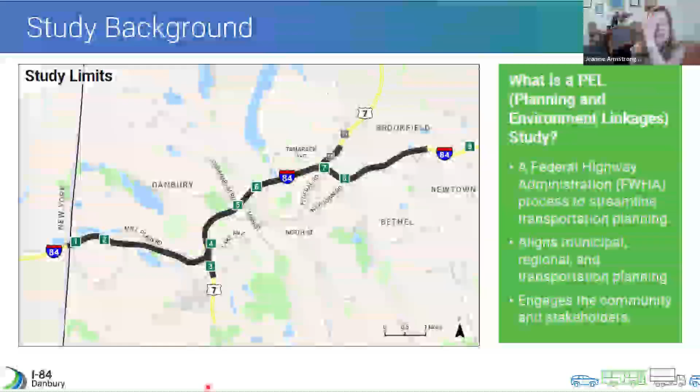So Janine will start taking us through the study background. Awesome, thanks Kevin. So hi everyone, I'm Janine, as Kevin said. I'll start us off today, and we've got lots of really good information to share with you.

As Marcy indicated, PEL stands for Planning and Environment Linkages, and it's a process under the Federal Highway Administration that streamlines transportation planning. The PEL really aims to align municipal, regional, and statewide transportation planning efforts such that they are congruent and complementary. It considers things like the environment, community, and economic goals, and tries to do that early in the transportation planning process.

A key element of PEL is the interaction with community members and stakeholders, such as yourself. Some of you have been in meetings previously, I recognize some of your names. Through this process, we've held several community information meetings, engaged with a project advisory committee, or PAC, which includes local government representatives, businesses, stakeholders, organizations, neighborhood groups, and the like. We've also held a number of pop-up meetings at various venues throughout Danbury and the surrounding area to really understand the concerns and ideas that folks in the community have.

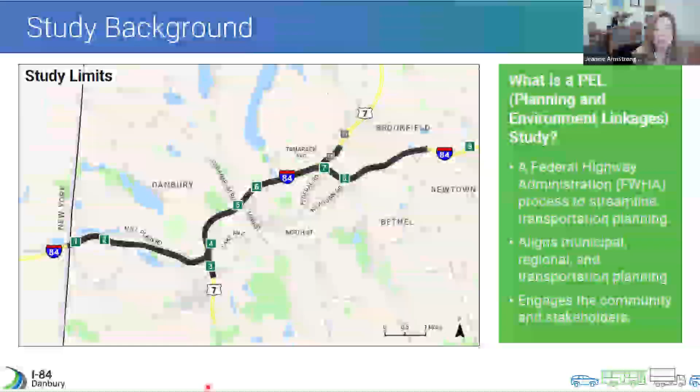So as you can see in this graphic, this is our PEL study area. It's about a 10-mile portion of the I-84 corridor. It extends slightly beyond the New York State border to the west and slightly beyond Interchange 8 to the east, going towards Newtown.

Next slide, thanks. So the PEL study is really the initial element in a progression of actions towards developing one or more viable projects. Through the PEL study, which we'll spend the majority of our meeting today talking on, we've identified and evaluated a number of potential projects and analyzed their feasibility, which we'll present in greater detail today. But there are a number of other processes that come along as well.

Once the PEL study is concluded, and we're right at the precipice of concluding that, the next phase will consist of the environmental study and analysis through two different federal and state acts: the National Environmental Policy Act, or NEPA, and the Connecticut Environmental Policy Act, which is CEPA.

So through these processes, the alternatives we'll talk about today are thoroughly vetted for potential human and environmental impacts. The next key element after NEPA and CEPA review involves regulatory permitting and design from the engineering perspective. Finally, we go to construction, possibly in phases, depending on the size and extent of the improvements and the number of projects. That's a very high level overview of the process.

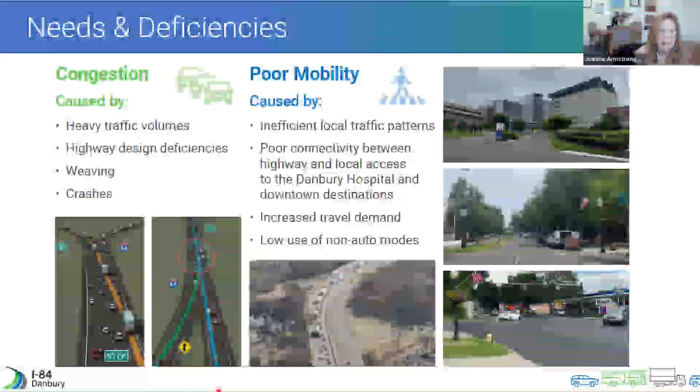So that's congestion. On the other side of the equation is poor mobility, which is the inefficiency of moving people and goods to and through the greater Danbury area. It's also attributed to a number of things, including the grid through Danbury that doesn't provide very good east-west alternatives, poor connectivity between the highway and key local destinations like downtown and the hospital, increased travel demand, which also exacerbates poor mobility, and the lack of alternative travel modes - things like robust bus, rail, bicycle, and pedestrian lanes. So all of these are things that we've seen on the highway.

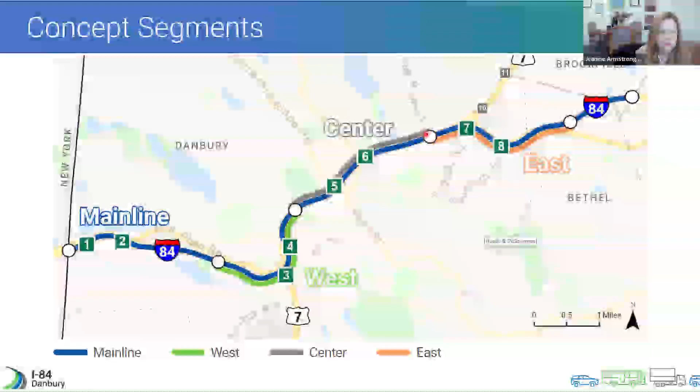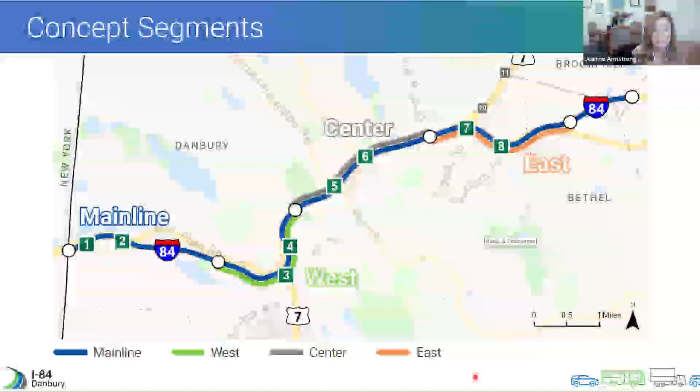In order to better analyze the different issues along I84 and the adjacent corridor, we broke the study area up into 4 distinct segments as shown on this graphic. The main line, which runs along the full study area from left to right, is shown in blue - Sharat's showing it in red. The west segment is shown in green, the center segment is shown in gray, and the eastern segment is shown in orange. We broke the highway up this way to enable us to assess how individual concepts can address the unique needs in a distinct area within the 10-mile corridor. We're going to spend a good amount of time getting into the details of what those concepts and issues were.

So the PEL analysis began with 26 separate concepts or improvements. Each of these was aimed at addressing the 2 main areas of deficiency, which is congestion and mobility issues. We had 7 concepts on the main line, 3 in the west segment, 9 in the center, and 7 in the east segment.

Concepts included things like interchange and ramp improvements, some highway modifications to create continuous or express lanes. We looked at interchange improvements, transit options, a wide variety of strategies that focused on operational improvements, travel management solutions, and then a number of alternatives that included something called a collector distributor road, which is just a roadway that collects traffic from the exit ramp and distributes it to a local roadway. Typically, it's in parallel to the highway.

So we want to back up a half a second. How did we come up with these concepts? Well, we had lots of meetings. We had workshops with the city, with the public, with the PAC, state and federal stakeholders, with DOT, with FHWA, the consulting team, and a whole bunch of others.

And each of these concepts or potential improvements was analyzed through a 3-tier process. The first is a fatal flaw analysis, which looks to determine if the concept was consistent with either reducing congestion and/or improving mobility, if it was feasible from a construction or cost perspective, and if it had the potential for excessive or disproportional environmental or community impacts.

When we look at the next part of the interchange pairs on 5 and 6, this is mostly just working through the lane continuity with those breaks, so there's not much else going on in this area.

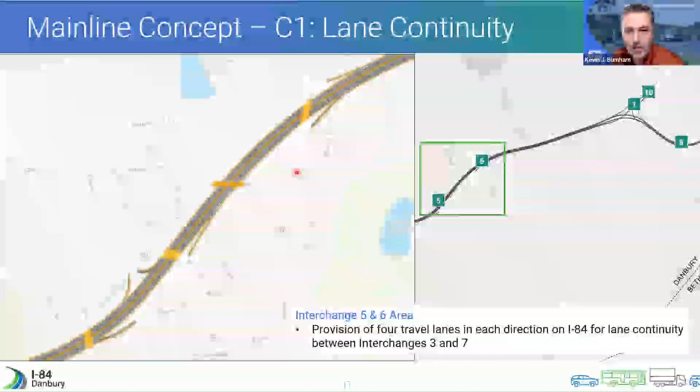In the interchange 7 area, similarly, we do correct some of that lane continuity, but again, like interchanges 3 and 4, we deal with a left-hand exit brought back to the right-hand exit. Also, that is these two here that are shown in red and blue.

Next is also dealing with some of the traffic that is coming from Route 7 southbound and merging with 84, and that's making a provision for that to be two lanes of traffic there to help ease some of the backups.

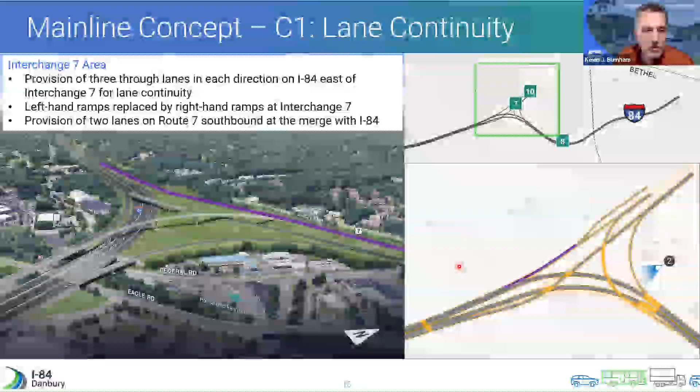Go to the west concept. We in this one, we were dealing... no, oh here. Don't seem to have the west. So we'll talk about, we're somehow missing the thing. So we'll try to get back to that. But these are actually the different concepts of the center section.

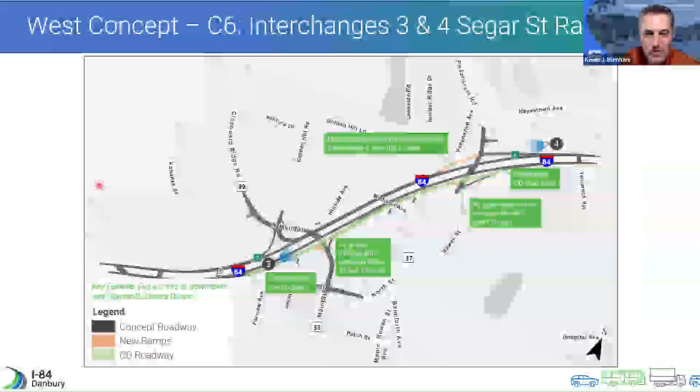So those dealt mostly with different access problems. So go back to the other one that seems to be mislabeled, Sharat, but if we back up one slide, this one is a scenario, a concept that looks to better connect the two. Oh, he's jumping to that. Well, I'll wait till you get to that if you're going to get to that right slide. Are we sticking with this one, or are we going to go to? Stick with six. Stick with.

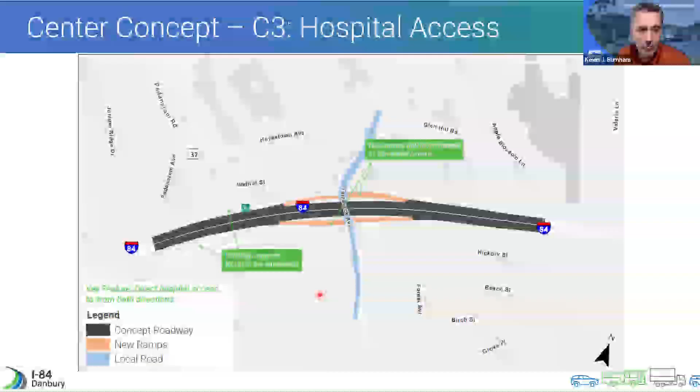Okay, so in this case, there were three in the center section. There were a lot of access problems in that middle area, and we had three ways to look at them. The first one, the one that you see here, provides full access interchange at Tamarack Avenue. This would provide ramps from both directions that would give better direct hospital access in both directions.

The other possibility is to use a partial interchange at the Great Plain Road interchange. Let me jump here if you're having a problem there. Yeah, it's kind of lagging a bit. So yeah, I'm going to jump here for a second.

Present my one so that we... give me just a second for it to come up. Does everybody see that screen now? Not yet. It's sharing your Windows, a blue Windows screen right now, oh Kevin. Sorry about that, it might be on the wrong window.

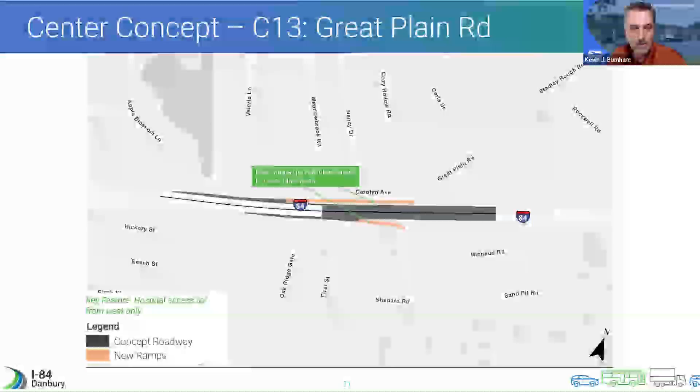Yep, and it's not getting over to the right. There you go. Well, now it's showing center concept C13, Great Plain. Okay, so that's back with Sharat, right? That's you, Sharat? Yeah, okay, so this center concept

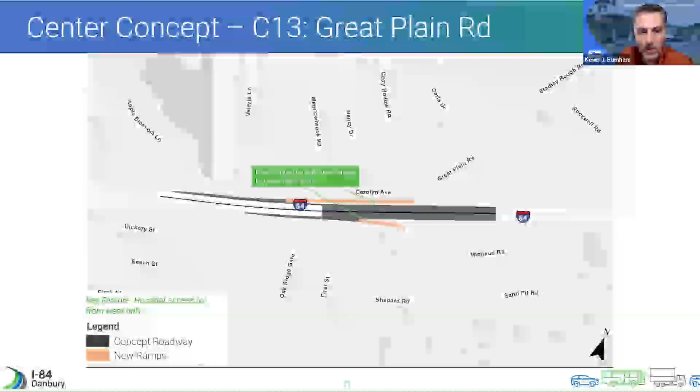is showing access to the highway to Great Plain Road, which does provide some better hospital access, but the disadvantage of this compared to Tamarack is that it only provides these partial ramps, so the access to and from the west is good, but the east does not get that same benefit.

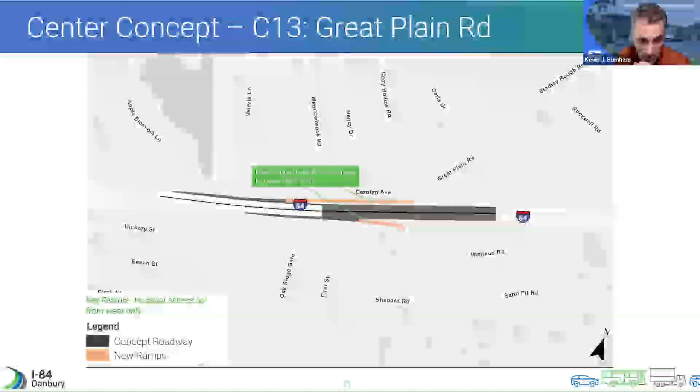If you can try to get back to that, here we are on this third center concept, which looks to better connect some of the business areas, the downtown access to the downtown business areas, by creating a collector distributor road between exits 3 and 4 and adding some new ramps to complete the interchange at North Street.

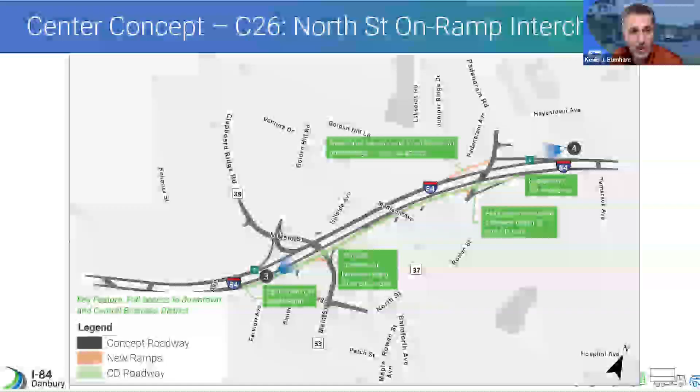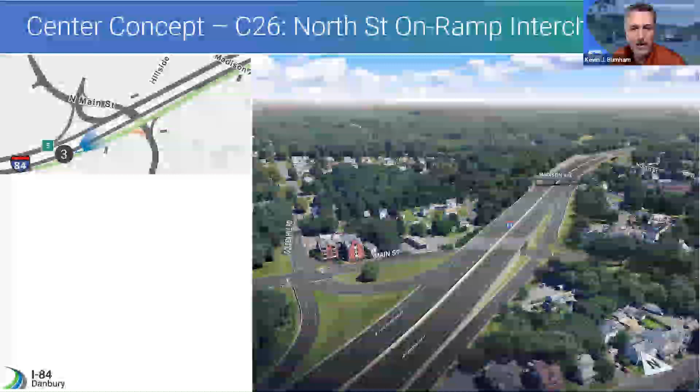If you found it and if you can get back to the west, that would be good. Oh, here's another view of that, how that center concept would work with a little aerial view where you can see that.

If you can try to get back to that west. Yeah, I'm going to pull the west one quickly. Yep. Just have to share a different screen. Yep.

A second. So the West was dealing with a problem of the weaving, which Janine talked about, how there were, because of the way that some of these interchanges are set up, traffic... we have this overlap between this area that 7 and 84 overlap, and because of that, to get to the right, with these left-handed exits, you're having a number of these weaving sections which cause conflicts.

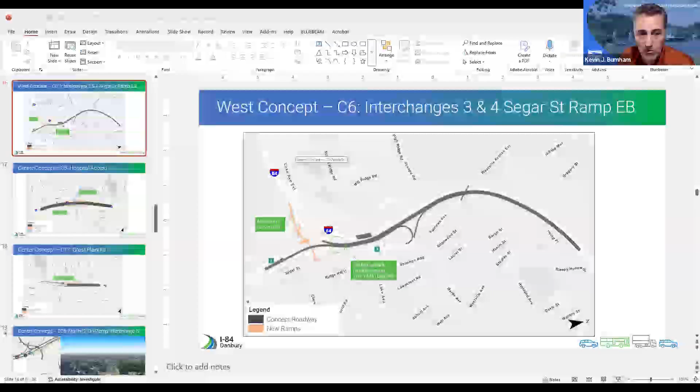And if you can see here, this particular alternative would add this new ramp at Segar Street. So for those coming on eastbound 84, they would take off this new ramp at Segar Street, and that's how they would get now to the area of exit 4. And the highway itself would have a median barrier between 84 and 7 so that that traffic wouldn't be weaving to go into exit 4 over there at Lake Avenue.

Now, if we could get on to back to the east side. Just share my other screen. Okay.

The east side was dealing with some of those weaves. We looked at putting in a number of collector distributor roads, and by keeping the traffic on those collector distributor roads, it in some way prevents some of that weaving going on.

Here we are at the center, and here we're back to the east concept. So here you see that we add a collector distributor road. Those are the green lines paralleling 84, and they help better distribute that traffic, preventing some of those weaves and adding a couple new ramps in there as well. It also does a little bit to address the curvature in the road in this section. There are some local street improvements too, which we'll talk about more when we get into the breakout projects in more detail.

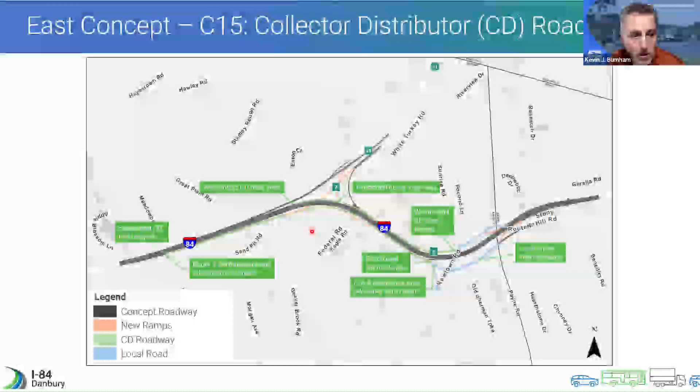So that kind of gets us into the breakout projects now. Those were the groups that were the concept combinations that Janine talked about going through the screening process. She also talked about a number of breakout projects, because all those projects could take some time, have some expense, and time duration involved. So we're looking at some other breakout projects.

So the first one we're going to talk about is the dynamic lane use. This would be looking at this area here that you see in orange, from a little bit west of interchange 3 up into the area beyond interchange 8, and up to 7.

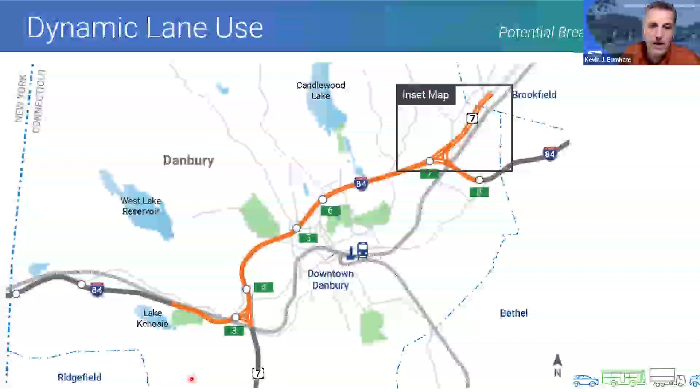In that area 7, we do try to immediately address some of that other part of the project we talked about, by adding additional lanes there, which are shown on the inset map.

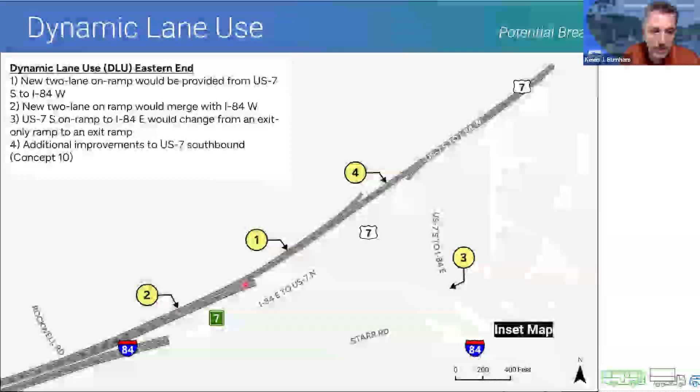I think there might be, here we go. So we look to, by adding some capacity with this dynamic lane, we will have the opportunity to open up this on-ramp as well.

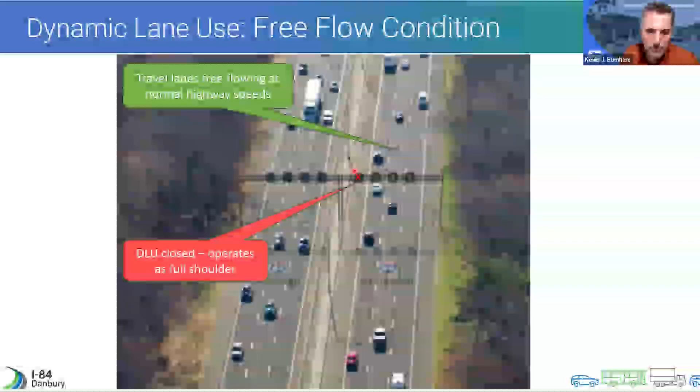So when we're in free flow, as I said, we don't want to have traffic moving in that shoulder. Traffic is flowing at normal speeds, and there would be a lane use sign that would close off the shoulder. Next, when traffic begins to get congested on the interstate...

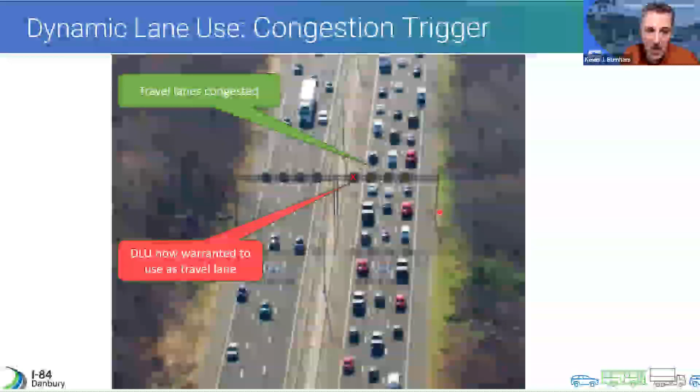There would be conditions that we would see back at the operations center that would say this is now warranted to use as a travel lane. Then we would open it, and a green arrow would go there, reducing the congestion. It wouldn't eliminate the congestion and go to free flow. If it does start to get back to free flow, the lane would be closed again.

And so with that, that's kind of a summary of that. That's something we're also calling a flex lane. Let's see, what else do I want to tell you on this?

That's the reason we see this addressing a lot of the congestion problems quickly. We're not taking any more right of way. We're able to build this out with far less lengthy modifications. We do have to put up sign structures, and we do have to do some pavement work, but this is still within the right of way of the highway, and it could get done on a much quicker schedule.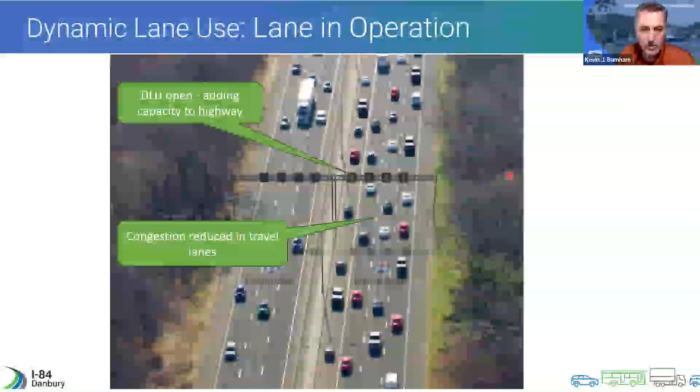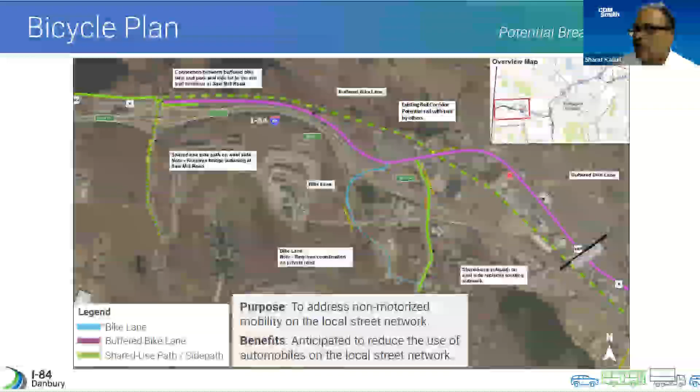We do have some other breakouts that Sharat will go into now. Thanks, Kevin. So besides the dynamic lane use, which is also called flex lane, we looked at other options. Like Janine said, there was a concern with improving mobility in the corridor, and improving local mobility specifically. We looked at other modes, and I'm going to talk about some of the work we put in to look at other modes of travel, starting with the bicycle plan.

Throughout the project corridor, for this entire section of about 10 miles or so, we looked at all parallel and intersecting roadways in the corridor to see what type of opportunities exist for providing bicycle facilities. These are not only state roads, but even local roads within the city of Danbury, and how we can improve those bicycle connections.

This slide shows one portion of the bicycle plan. We have a bicycle plan at an early level that shows all the areas within the city of Danbury. I'm sharing this one because it has more emphasis on why this area was considered to be more important, as we looked at this section of 84.

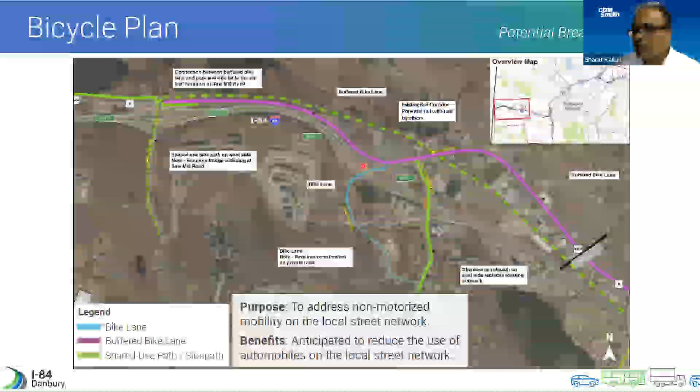There were opportunities that came upon us through talking to the city and other stakeholders that Mill Plain Road is a potential opportunity for providing those bicycle facilities. We did move forward with looking at Mill Plain Road and trying to see how we can not only maximize the use of the existing pavement, but also see the potential for combining the bicycle and pedestrian facilities.

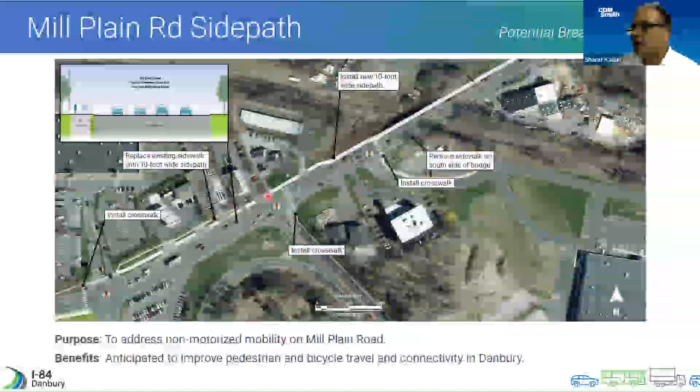There's also a lack of missing sidewalks along Mill Plain Road from the state line all the way up to interchange 4 at Lake Avenue. As you can see in some of these places, there are driveways and other competing areas. The idea was to install what's called a side path, which is essentially a term for a mixed use path, a bicycle facility and a sidewalk together.

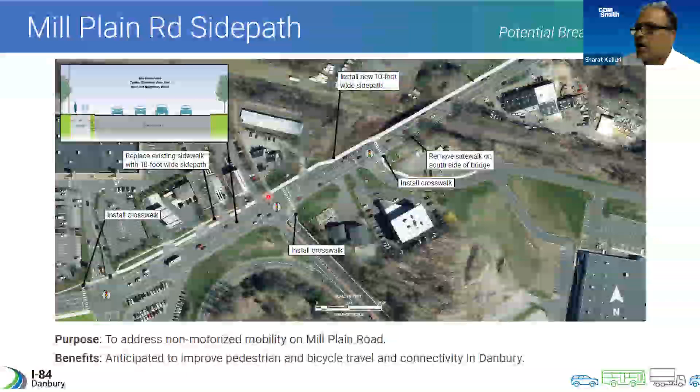We have prepared a plan showing how the side path is going to work from the New York line to Lake Avenue. Again, this is an initial plan that is still being worked on with the city, showing opportunities of how we can improve non-vehicular mobility on Mill Plain Road.

We also looked at transit, especially bus transit. As you know, HART operates the transit services within the city of Danbury. There are a lot of services now in the city that go through a pulse point in downtown, and people have to transfer when making trips from one end of the city to the other. There are also services that go to the Harlem line in New York, and there to Brewster.

So we looked at existing services, and at a high level we recommended some more regional services, highlighted in green, like connecting from New Milford to Norwalk, kind of complementing the 7 commuter rail service going to Norwalk.

Also, we looked at improving the connection from Southbury. There's a good amount of population in Southbury that goes through this area as well, so we looked at how we can improve that connection from Southbury to Brewster and then provide a connection to the rail station in Brewster. This is again a very initial plan—there has to be more analysis done, more effort done in identifying specific schedules and looking at transfer points.

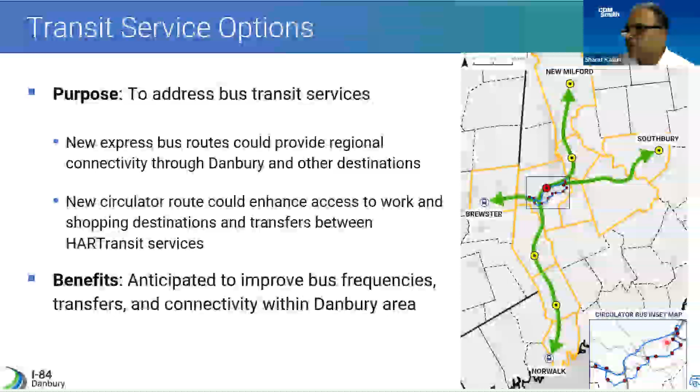In blue, what you see is a local service that we recommended, and this is essentially to eliminate that transfer. Right now, if you're coming from New Milford and want to go to the mall, a lot of the times you would have to transfer over at the pulse point. So this circulator service enables you to make a one-stop trip, getting access to transit faster and getting to the destinations you want to go.

A fourth breakout project is the Interchange 8. This is the area of Interchange 8 east of the existing Route 7 merge at exit 7. We call this a turtleback interchange—it looks like a turtleback, but the whole concept here is to improve circulation within the interchange area.

As you know, this is an east and west road—one-way eastbound, one-way westbound. A lot of people who come down from Newtown Road, from where the shopping and retail is, turn right on Route 6 and then have to turn around and go west on Newtown to get back to the highway if they're going towards New York.

The concept here, which is a relatively new concept for Connecticut, is to look at how we can switch that movement to the left side. What that enables us to do is eliminate this amount of traffic that circulates around, goes to these gas stations and comes back on, and instead put them on a separate roadway on the left and merge them back to the highway.

So they don't have to travel this entire length of Route 6 to get back on the highway. Also providing better access from Route 6 onto 84 East.

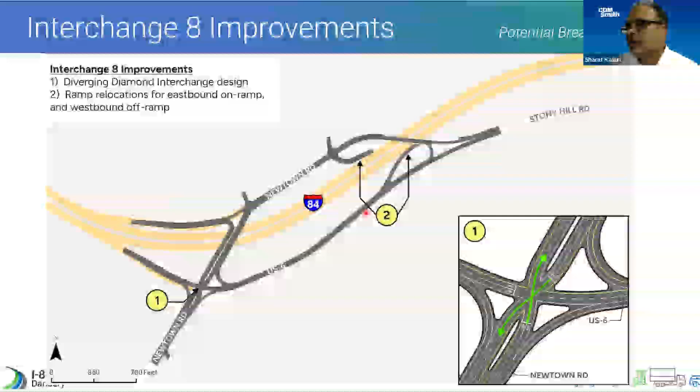And providing better connections from Route 6 as you're coming from the Target side. So again, this concept looks at providing a better circulation pattern along this Route 6 Newtown Road area, and not allowing traffic to make these unnecessary movements where they're destined to the highway or to local points within this area.

So I think the idea here is to make that mobility benefit within that Interchange 8 area. The last of the breakout projects I'll talk about is Main Street, North Street, and Downs Street.

And this project is getting a lot of traction. We've made a lot of progress on this in terms of meeting with the community, which I'll talk about in a second. When we looked at this intersection, it's the center point of the city where all the traffic comes together.

As you know, there's no exit 6 eastbound on 84 as you come from New York, and you can't get back on 84 going west toward New York. A lot of traffic now comes to Downs and goes to Main or North, depending on where they're headed. So this intersection just becomes very complex, congested, with a lot of crashes and accident data that we noted from here.

Also, we noted that Main Street, as you come underneath the highway, has got a sightline problem, because it's very hard to see the traffic light that exists today.

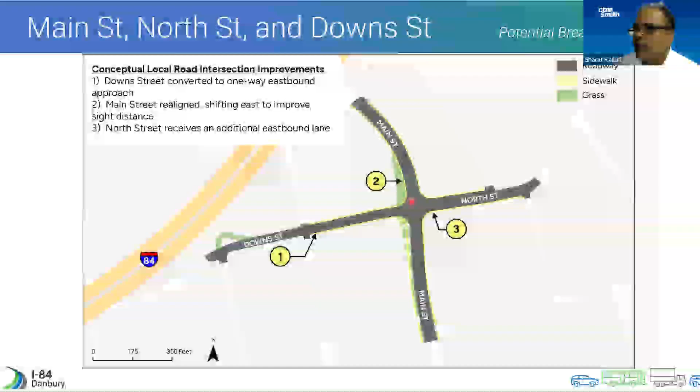So we reached out to the community back in early August, late July, with a questionnaire. A lot of the results we got matched what the data said — they all identified traffic delays as a big concern.

Speeding is a concern, especially when it's not a congested time period. They mentioned the sight lines along Main Street as a big concern, and in general, markings and other types of issues. That was the focus for us to get feedback from the community and see how we can advance a concept through this area.

The other question we posed about Downs Street was whether there's interest in converting it from a two-way into a one-way street. This would be the portion of Downs Street from Farview all the way up to Main Street, gauging the community on how they felt.

Two-thirds of the community, we had 160 responses, and two-thirds of those responses were in favor of either supporting the idea or loving it, which was very positive for us to understand, because Downs Street does have a lot of traffic that comes from the ramps.

So again, this is one of the projects being looked at very closely. There's been support from the city to move this concept forward. I'll turn it over to Nilesh.

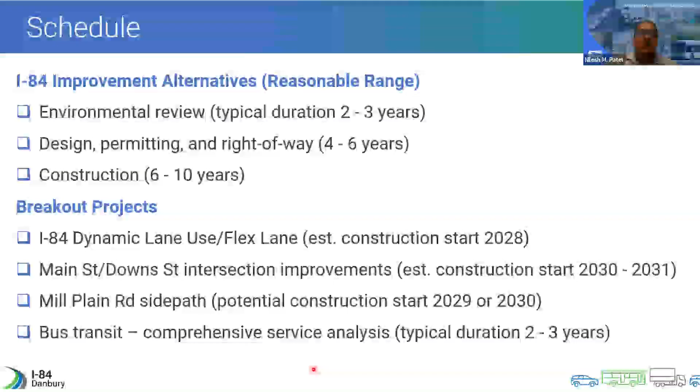So with that, I think we have wrapped it up. Apologize for some of the technical difficulties, but we've got time here for Q&A, and we've got time to even go back to some of those segments that may have been a little confusing during the presentation. So we're here as long as it takes to answer questions. I'm going to just turn it over to Marcy to kind of moderate.

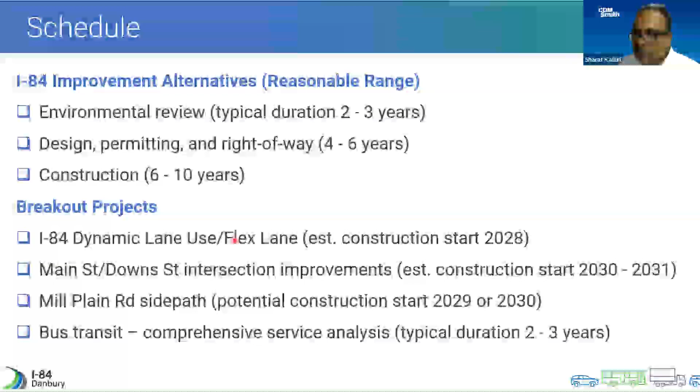Sure, exit 4 westbound, that's dealing with Lake Avenue. Yeah, let me go to the slide. We can talk about some of the improvements, especially reviewing the removal of the left-hand exits for Route 7 South and what happens there. I think the question specifically is related to getting over -- I think the concern is the weaving between 84 westbound to 7 South, or even looking at 84 eastbound to get to Lake Avenue. In terms of the ramps, we are switching the ramps on the main line from the left-hand side to the right-hand side, and on the eastbound direction to get from 84 eastbound to Lake Avenue, when you make that exit, it's a pretty quick exit as you move over from 84 eastbound to exit 4. What we're looking to do there, let me share my other screen, is to provide access to Segar Street, a new ramp off of 84 to Segar Street, which allows the 84 traffic to get off at Segar Street and not have to be part of that traffic that wants to get to exit 4.

Because that's the concern that you have today: when you're coming on 84 and want to get off at Lake Avenue, you have to move over at least 2 lanes, and there's a lane drop right at the merge. So the Segar Street ramp allows someone to get off at Segar Street and prohibits someone from making that exit at exit 4.

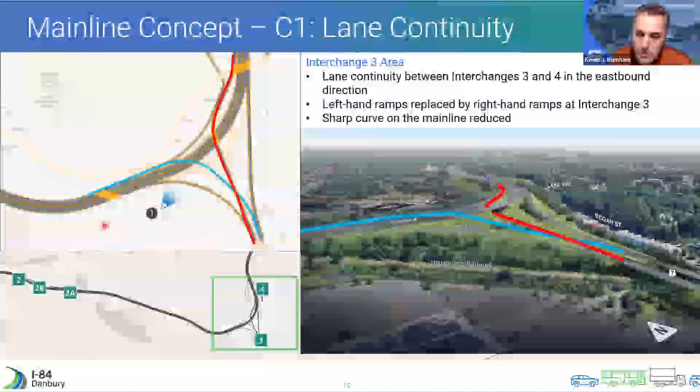Thank you. All right, next written question is from an anonymous attendee: What environmental review is needed for opening the shoulder?

Yeah, so the project, the dynamic lane use, which is now the flex lane, we've started coordinating with FHWA, Federal Highway Administration, and even other states. We talked to many other states that have implemented this, and in accordance with the regs, it does have to go through an environmental review process. It's a construction project, so it has to follow all the regs. But in this case, the level of environmental review is not as complex as the larger I-84 improvement alternatives. It's what we call a categorical exclusion, which allows us to go through the process a bit quicker than larger projects that would require an environmental assessment or an environmental impact statement.

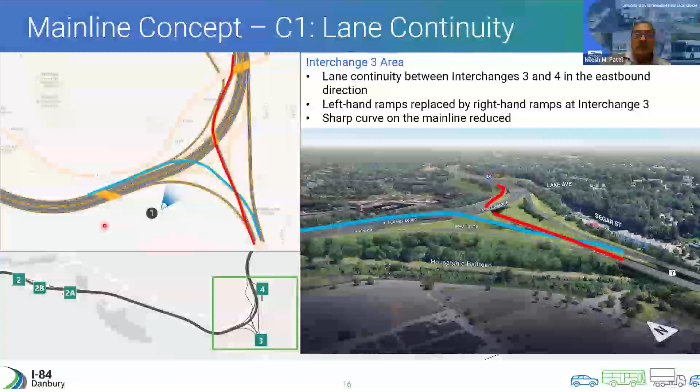Yeah, I think we're aware of that in terms of what the city is looking at, so we continue to work with the city. Mill Plain Road is a state road facility, and we don't have jurisdiction over the railroad. I think it's owned by Housatonic Railroad. So we're looking at what we can do on state road facilities to improve connectivity and mobility, but we'll continue to work with the city. We met with them recently, with their planning and engineering departments, and they are moving the project forward. There are a lot of challenges with it, but that's part of the process.

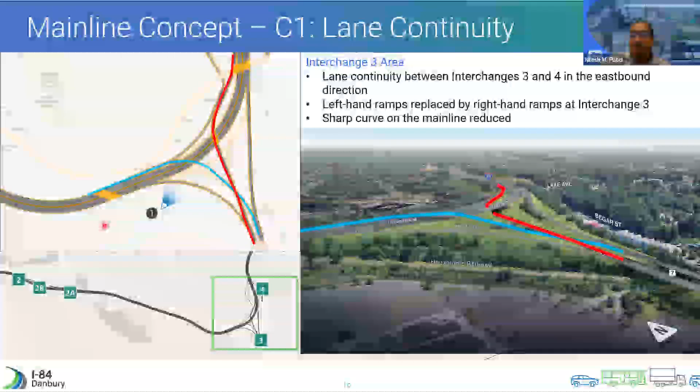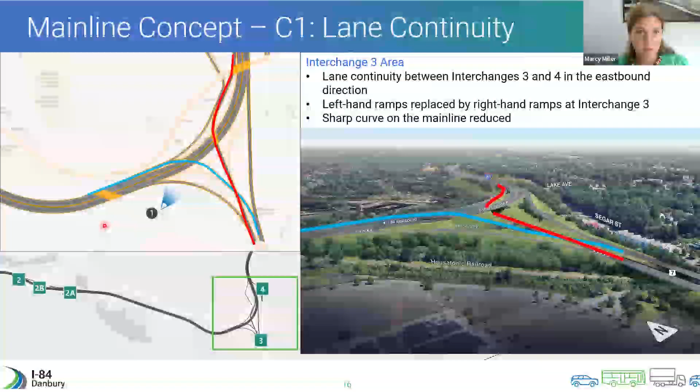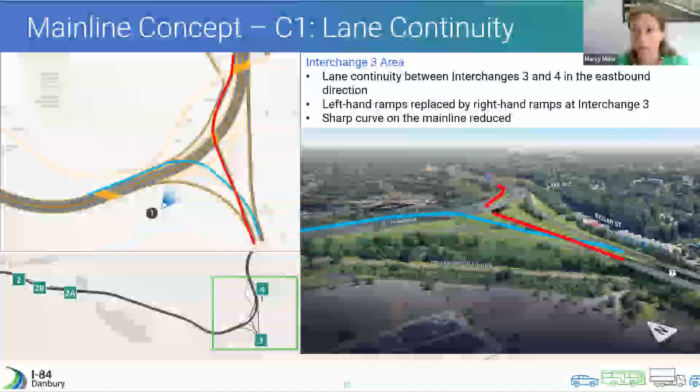At this time, I don't have any more questions typed in or any hands raised, so we will wait another minute, but maybe this is a good time to go on to how people can comment, which is the last slide in our deck, Sharat. Yeah, let's go through that and then maybe wait another 30 seconds or so if people are typing.

So, how to comment. We did mention that there would be more ways to comment other than just this meeting today, and we're going to keep a general comment period open for about two weeks until July 22nd. There are three different ways that anyone can comment. One is to email our general inbox, info@i84danbury.com. You can also go to the website, www.i84danbury, and click on the comment in the menu bar, which leads to a form you could fill out. And then you can call a number at the Department of Transportation in Connecticut, 860-594-2020, and leave a message at that line as well.

We do ask for everyone to submit their comments within the next two weeks by July 22nd, and they will become part of our summary, which will be made available on our website eventually so you can read through them. And I'm glad we went to this slide because we have one more question that came in writing that I'll read aloud now.

It's from an anonymous attendee, and it says: how does this stretch of highway compare to others within the state? That's a big question, so take it away.

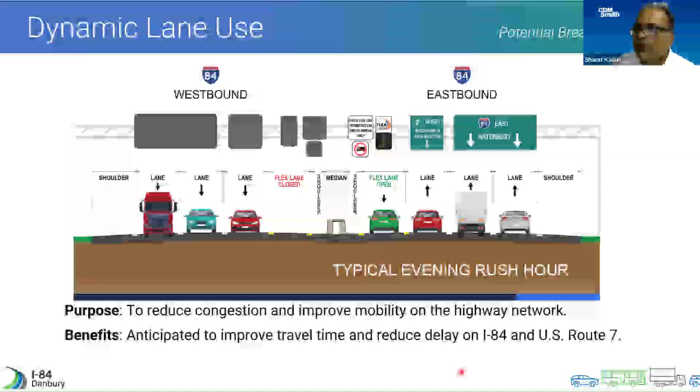It's only a 4-mile stretch, so we are going to be allowing that lane change to happen when the shoulder is open. That's basically because of the short stretch and how we really want it to be effective for the most amount of our traffic. We want the traffic to be able to get in and out from different exits along the corridor.